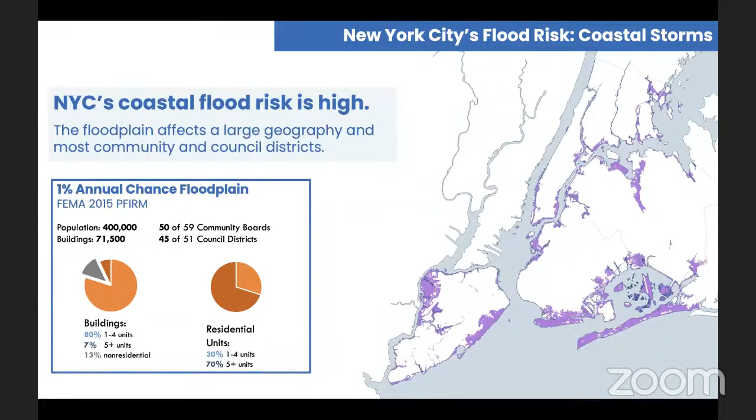This is important because it makes New York distinct from the floodplain across the rest of the United States and presents a challenge to New York City and other urban areas, because FEMA's regulations are very much based on a suburban or rural mindset of single-family detached homes. So one of the challenges New York City has is that the federal regulations and the federal insurance program are geared to that suburban or rural mindset, and we have to come up with our own strategies for the building stock in New York by and large. Next slide, please.

That was looking at just the flood risk that we face today, but we recognize that our floodplain will grow with sea level rise and climate change. By the 2050s, the 1% annual chance floodplain is projected to grow in size, anticipated to grow further inland. That's going to cover roughly 1/4 of the city's total landmass.

It will very closely resemble today's 0.2% annual chance floodplain. With that growth in geography, the number of people in that future floodplain is expected to be roughly 800,000 residents. That's not counting population change over the next several decades, just today's population in that larger geography. The number of buildings would go up from roughly 71,500 today to 122,000 by the 2050s using the high-end projections.

That infrequent flooding event, like a Hurricane Sandy or the 1% annual chance storm, is just one dimension of flood risk in New York City. Another dimension are the lowest lying areas of the city, where sea level rise will lead to what will be regular or even daily tidal flooding in some of the most low-lying areas.

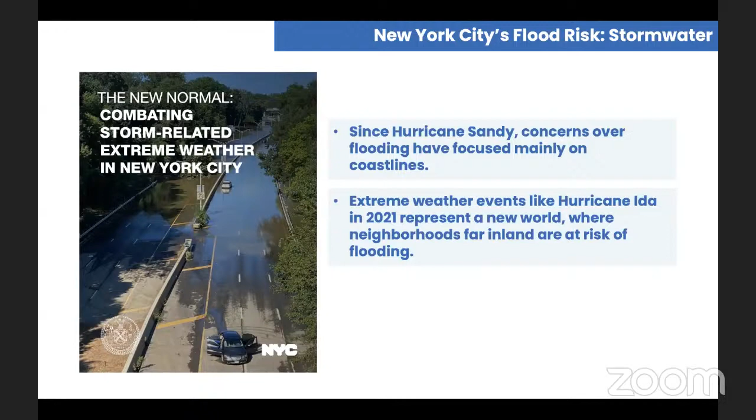So we present this vision for climate resiliency and adaptation. In the next 10 years, urban coastal adaptation will be driven by the climate justice principle that all New Yorkers should live, learn, work, and play in safe, healthy, resilient and sustainable environments, even as the climate changes.

So I'll start to lay out the goals and strategies. Goal number 1 is about expanding the awareness of climate risks and how New Yorkers can take action to adapt to the impacts of climate change. Part of this is about building a common understanding of local climate risks.

In New York City, we are fortunate to have the New York City Panel on Climate Change, a 20-member independent body that produces science on current and projected climate trends. These are convened at the behest of the mayor, but work independently. The NPCC was codified into Local Law 42 in 2012 with a mandate that they provide an actionable source of climate information on future climate change.

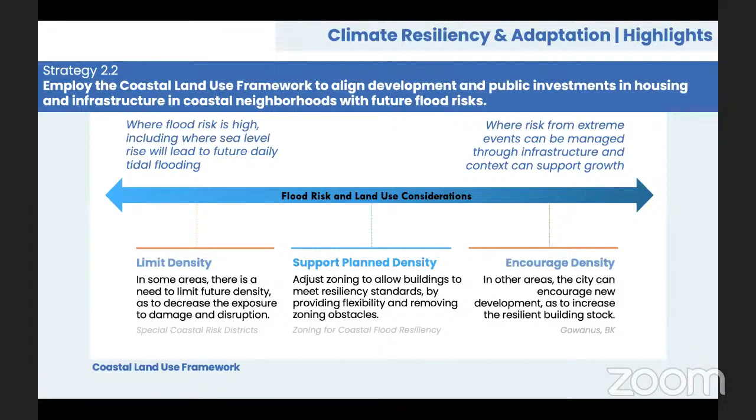That is what we did with zoning for coastal flood resiliency that the City Planning Commission adopted last year. Then finally, where risk from extreme events can be managed through infrastructure and the context overall can support growth, we seek to encourage density. These are areas of the city that can encourage new development as a means of increasing the resilient building stock. This is a strategy that played out with Gowanus.

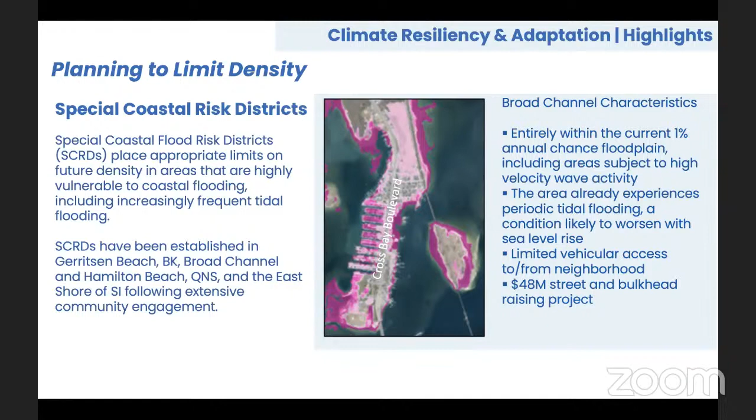There's very limited vehicular access to and from the neighborhood today, just one road north and one road south. And the neighborhood is already undertaking a $48 million street and bulkhead raising project to elevate those streets on the left-hand side of the image that are particularly low-lying.

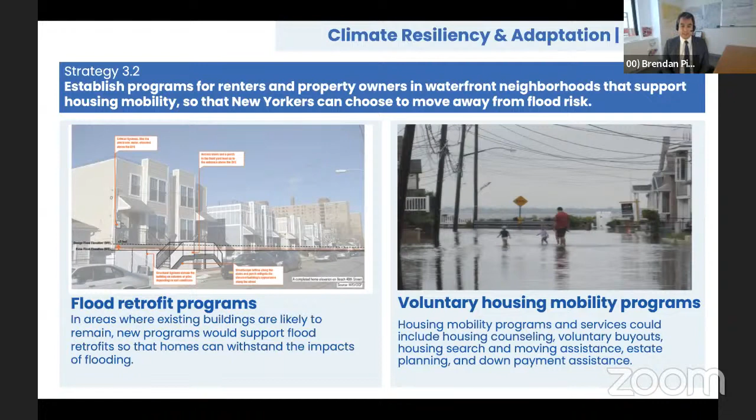The next goal speaks to coastal protection. These are the engineered systems that minimize the effects of storm surges, wave impacts, and sea level rise that are part of the city's multiple lines of defense. Coastal flood protection projects work in tandem with design features for buildings and critical infrastructure that raise mechanical equipment, livable space, and other uses above projected flood elevations.

Coastal protection projects can be large scale, spanning miles of the coastline and covering multiple neighborhoods. They are cross-jurisdictional projects that require extensive coordination and collaboration. The city's goal is to continue to identify opportunities for coastal protection where feasible to manage the impacts of climate change.

The city is in the process of planning and building out a $15 billion portfolio of coastal protection projects to reduce flood risk in neighborhoods across New York City. Several of the city's post-Hurricane Sandy coastal protection projects are now entering their construction phase. However, given the different funding sources and the varying complexity of these projects, they're expected to come online at different times through the 2020s.

One quick note about coastal protection projects: they often come to the City Planning Commission following years of planning and engagement, with land use actions that are relatively minor compared to the scopes of these projects, to provide coastal protection and to maintain or even enhance access to the waterfront. These actions can include amendments to the city's streets and grades and the acquisition and development of property that are necessary to link these systems together.

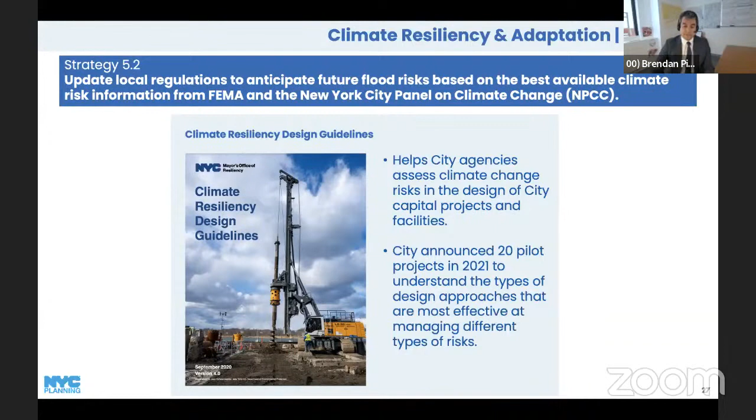In summary, the goals for climate resiliency and adaptation focus on expanding climate risk awareness and action, using climate risk information in public policies and investments, supporting the housing needs of waterfront residents, managing risks from flooding, and promoting climate resiliency design of buildings and infrastructure systems. The strategies that Michael and I have outlined will help New York City do just that.

Now, before I wrap up, I'd like to take the opportunity to connect what you just heard about the Comprehensive Waterfront Plan to a project that is coming back to the Commission for pre-hearing.

That project is Resilient Edgemere. With Resilient Edgemere, the Department of City Planning has worked side by side with HPD to apply the coastal land use framework to the neighborhood.

For that reason, a new special coastal risk district and amendments to the area's urban renewal plan would place strict limits on future development in the most vulnerable areas of the neighborhood, generally north of Beach Channel Drive. In less vulnerable areas of the neighborhood, generally along Rockaway Beach Boulevard and the elevated A train line, the land use actions would modestly increase residential density to support the development of new, resilient, affordable housing in the neighborhood.

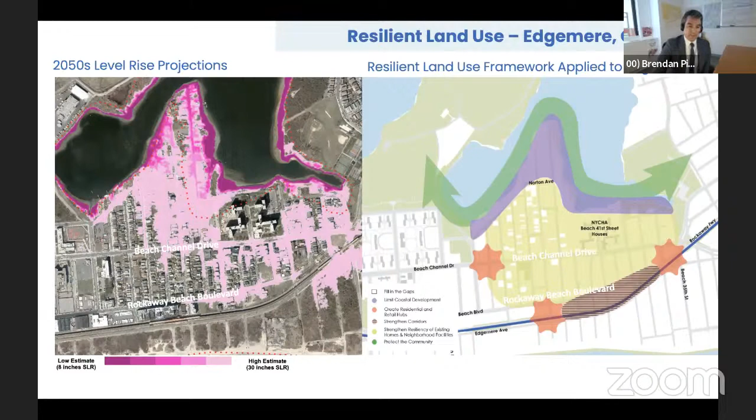When considering sea level rise projections, it is also important to keep in mind that the projections are a snapshot in time and do not reflect changes on the ground. While Edgemere faces significant flood risk, it is distinct from other areas of the city where the city has established special coastal risk districts, in that the Army Corps of Engineers has demonstrated and has funding for a coastal protection project. The Army Corps is currently designing a system that will reduce Edgemere's exposure to low-level coastal storms and sea level rise. While the potential for coastal protection is encouraging, it reduces Edgemere's flood risk.

It doesn't eliminate it. Because of this, HPD is taking a conservative approach to zoning and land use in light of long-term flood risk, while also seeking to enhance the vibrancy of a majority-minority neighborhood. This approach helps demonstrate how the far-reaching goals and strategies of the Comprehensive Waterfront Plan can be applied at the local level in support of a more resilient, more equitable, and healthier waterfront for all New Yorkers.

We really appreciate the opportunity to present on the Comprehensive Waterfront Plan this afternoon. That's the conclusion of this presentation. If time allows, Michael and I would be happy to take your comments and questions.

Thank you very much, gentlemen. We appreciate your presentation. I have a couple of questions for you.

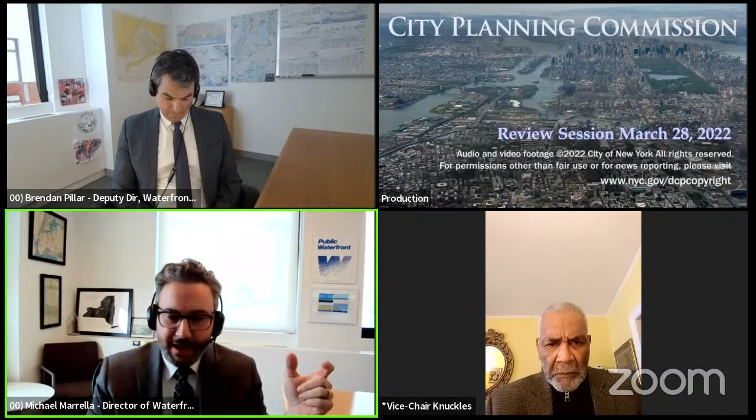One other dimension that's incredibly important is that there's the natural hazard, there are the implications on the structure, and then there are the implications on the lives of the inhabitants of the structure. You could have the same level of flooding for two different homes — if they're built identically, the flood risk would be the same. But if one homeowner has a mortgage and one does not, that could have huge implications for the rebuilding of that home thereafter, for instance.

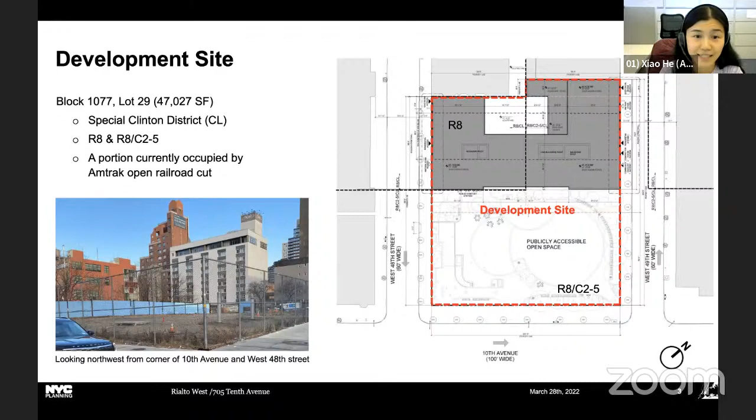As you can see from this close-up view of the development site, the middle and eastern portions of the site are vacant and the western portion of the site is occupied by the railroad cut. And here are photos showing a view from West 48th Street and 10th Avenue looking northwest, and a view from West 49th Street and 10th Avenue looking southwest.

The proposed development consists of a new 8-story mixed-use building and a publicly accessible open space on a shared zoning lot. The building would have 157 affordable rental units. There will be approximately 125,000 square feet of residential floor area and around 6,000 square feet of ground floor community facility space. There would also be a gym and laundry facility on the ground floor and a publicly accessible Parks Department comfort station fronting the adjacent open space. The rear of the building would also have an approximately 2,700 square foot landscaped inner courtyard for residents.

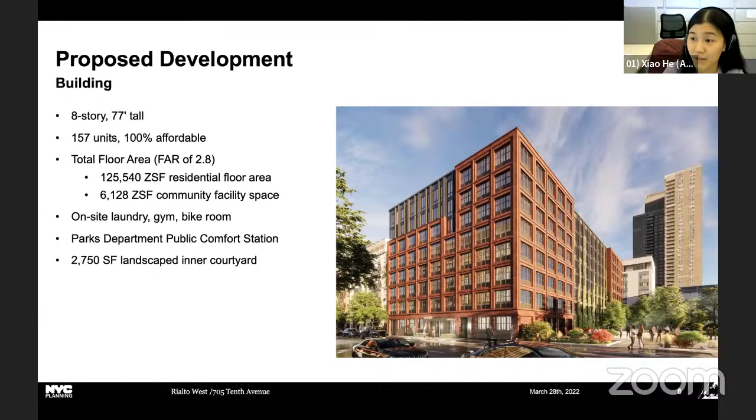As mentioned on the previous slide, there will be approximately half an acre of publicly accessible open space, which would sit on top of a city water tunnel. The space would remain under the jurisdiction of the Department of Environmental Protection, DEP, and would be maintained and managed by the Parks Department. The space would have a plaza and synthetic turf area, spray showers, seating areas, paths, and planted areas.

Zooming out from the development site itself, the surrounding area is mixed use with residential and community facility uses on the side streets and mixed use residential buildings with ground floor commercial use on the avenues. The building heights range from 4-story walk-ups to 15-story elevator buildings. There are several schools and supportive living services within a few blocks. In terms of open space, Hell's Kitchen Park and Clinton Community Garden are both located within half a block. The area is well served by public transit, with numerous subway stations within half a mile of the site.

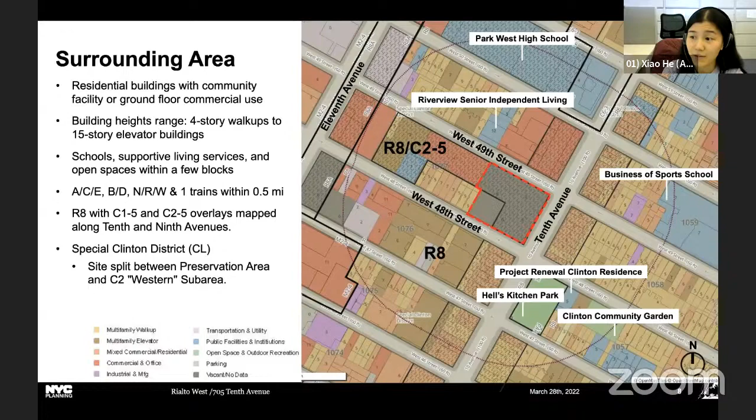Most of the area surrounding the development site is located within an R8 residential zoning district with C1-5 and C2-5 commercial overlays mapped along 10th and 9th Avenues. And as I previously noted, the entire site is in a Special Clinton District, which extends west of 8th Avenue between West 41st Street and West 59th Street. The site is split between the Preservation Area subdistrict and the Western sub-area. Both areas are subject to the same FAR, height, and setback regulations, which I'll go into greater detail on when I discuss the proposed actions.

A bit of background for context. In 2009, as part of the Western Rail Yard rezoning, the city committed to building affordable housing at 2 sites: this site, which is DEP owned, and an MTA owned site at 806 9th Avenue. The commission may recall that the proposed development at the MTA site, known as Thereto, is subject to a separate application certified on January 3rd and going through ULURP. HPD also obtained UDAAP designation and disposition authority for both sites in 2009.

Now I'm going to go through the proposed actions. The first action requested by HPD is a UDAAP approval of the development site. I mentioned previously that HPD obtained UDAAP approval and disposition authority in 2009, for the future housing portion of the development site. This newly proposed UDAAP seeks to cover the entire lot to facilitate the construction of the open space in addition to the proposed housing.

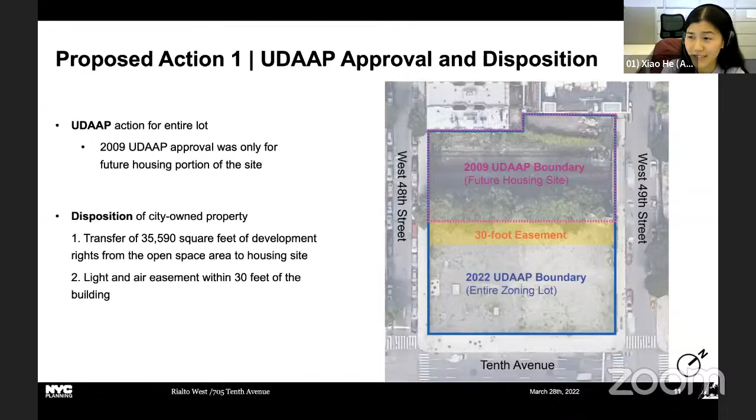The second proposed action is an amendment to the Special Clinton District text. This text amendment consolidates the existing height and setback waiver into a single section in the zoning resolution and allows modifications to bulk regulations, except FAR. In order to qualify for bulk waivers, the proposed project needs to meet 3 conditions: the zoning lot must be at least 40,000 square feet, it must front on a wide street, and it must contain existing public infrastructure.

This amendment was tailored to apply to 2 sites only, the DEP site of this presentation and the MTA site. As the commission may recall, this text amendment is identical to the amendment proposed in the application for Thereto, which is the proposed development at the MTA site. Therefore, this proposed action will be withdrawn if this amendment gets adopted through that application.

The amendment also creates 4 findings for the bulk waivers. These findings relate to difficulties in complying with regulations, light and air, scale and placement, and difficulties on the site.

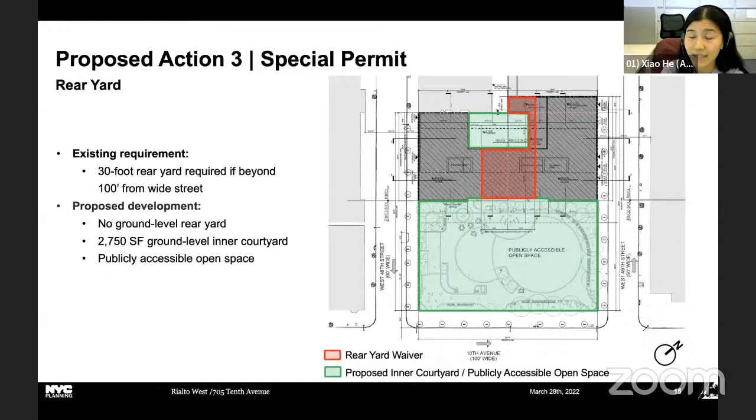Next slide. And to summarize, HPD is seeking to facilitate the development of an 8-story, 100% affordable housing building containing 157 units and around 6,000 square feet of ground floor community facility space. There would also be a publicly accessible open space next to the building. The proposed actions include a UDAAP approval with a disposition, a text amendment, and 2 special permits. And with that, I'm happy to take any questions.

Great. Thank you very much, Ariel. Excellent job. We appreciate it.

Let me just, I think I know the answer to this, but I just want to clarify. The disposition is on 2, there's 2, this is a slightly unusual one, which is why I want to highlight it. It's a disposition of development rights to the housing site here. That's one. And the other is restricting construction on the open space. Can you just say a little bit more about those two?

The second item on our agenda is a certification of a zoning map, zoning text amendments, special permit, city map amendment, and authorizations in Queens Community District 1. Our presenter is Sarit Platkin. Good afternoon, commissioners. Next slide, please.

This is a private application by Astoria Owners LLC for a series of land use actions to facilitate approximately 1 million square feet of development, including 1,400 residential units, including 350 affordable units, 1,800 square feet of commercial space, 23,000 square feet of community facility space, and 43,000 square feet of publicly accessible open space in Astoria Community Board 1, Queens. Next slide, please.

The project area is located on the Hallett's Point Peninsula on the East River waterfront. Two major prior land use approvals in the surrounding area include Hallett's Point and Astoria Cove that are jointly anticipated to facilitate over 4,000 units of housing, including 800 affordable units through the Voluntary Inclusionary Housing Program.

In 2013, the City Planning Commission approved Hallett's Point, a large-scale general development plan and related actions affecting a 34-acre area along the western and southern portion of the Hallett's Point Peninsula, directly southwest of the project area. The actions intended to facilitate approximately 3 million square feet of development across 11 buildings ranging in height from 11 to 31 stories. The development will consist of approximately 2,600 dwelling units, including 480 permanently affordable units, 70,000 square feet of retail, a public school and public intermediate school, and a 2.4-acre waterfront esplanade.

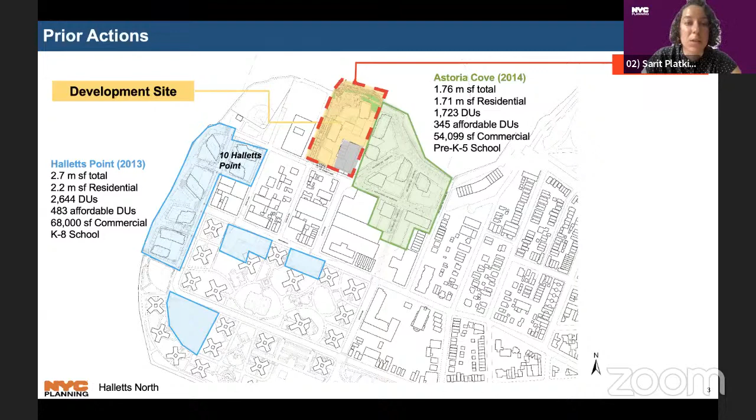To date, construction on the Astoria Cove development has not commenced. Next slide, please.

The surrounding area includes a mix of residential, commercial, light industrial, and park uses. The area directly east of the project area includes the Astoria Cove development site and is improved with warehouses and vacant industrial buildings. The area to the northeast is characterized by high-density residential waterfront development and open space, including the 23-story Shore Towers condominium development and Astoria Park. The area directly south is characterized by a mix of 1- and 2-story light industrial warehouses, open storage yards, and low-scale 1- and 2-family residential uses.

The New York City Housing Authority Astoria Houses, consisting of 1,100 units across 22 six- and seven-story buildings on a 27-acre campus, encompasses the southern half of the Hallett's Peninsula. Directly west of the project area is a large 2-story warehouse and distribution center for Airport Enterprise Technology that abuts Whitey Ford Field. The western edge of the Hallett's Point Peninsula includes the Hallett's Point development site that is currently vacant apart from 10 Hallett's Point, a 400-unit residential building with a fresh supermarket 2 blocks west of the project area.

Nearby public facilities and institutions include the Astoria Houses Community Center, Urban Upbound Jobs Plus, and Astoria Blue Feather Early Learning Center, located approximately 0.3 miles to the south of the project area, and the St. Margaret Mary Roman Catholic Church and Holy Protection Greek Orthodox Church, approximately 1/3 mile to the east of the project area.

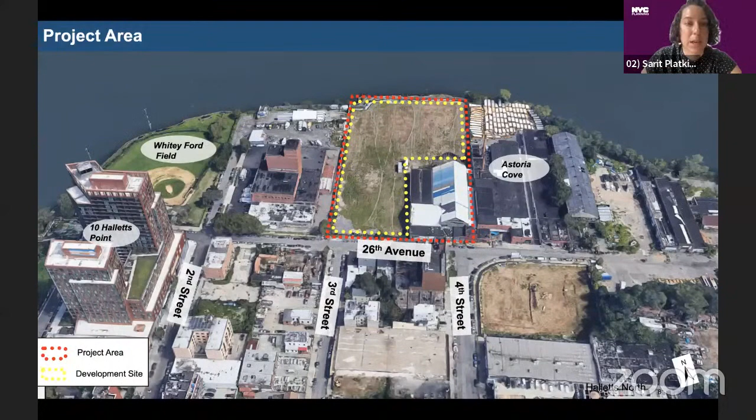The actions would facilitate the development of a mixed-use building with 3 building segments that would contain a total of approximately 1 million square feet of floor area at 6 FAR, including 1,400 dwelling units, 1,800 square feet of commercial

floor area, 22,000 square feet of community facility floor area, 525 accessory parking spaces, and approximately 1 acre of publicly accessible open space. The proposed development would also include 350 permanently affordable units pursuant to option 1 of the Mandatory

Inclusionary Housing, or MIH, program.

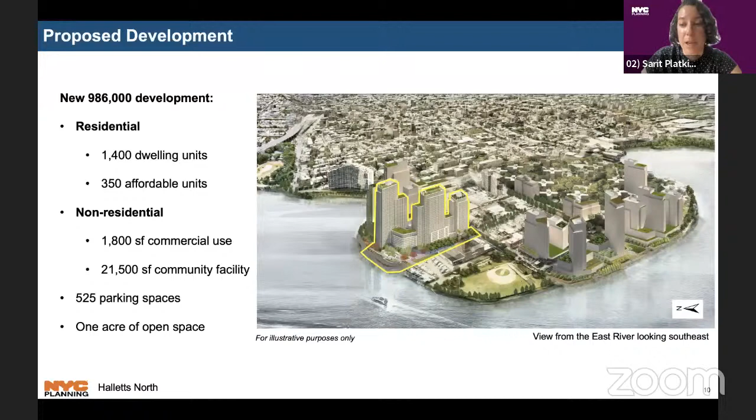The proposed development would consist of 3 building segments that increase in height as the development approaches the East River waterfront. Segment 1 would front 26th Avenue and rise to a maximum height of 238 feet, or 23 stories, above

a building base of 130 feet, or 13 stories. Segment 2 would be located along 3rd Street and rise to a maximum height of 318 feet, or 31 stories, above a 240-foot, or 25-story section of the building.

Segment 3 would be located at the end of 3rd Street facing the East River and rise to a maximum height of 350 feet, or 34 stories, above a 110-foot, or 10-story building base.

Given the long facade, the applicants have employed strategies such as setbacks along 3rd Street to break up the massing and create more of an undulating effect on the facade.

Non-residential uses would be located at the base of the building, concentrated along 26th Avenue to provide amenities and retail to the surrounding area. Due to the project area's location within flood zone AE, the proposed development would be elevated approximately 8 to 9 feet, such that it would be approximately 3 feet above the base flood elevation.

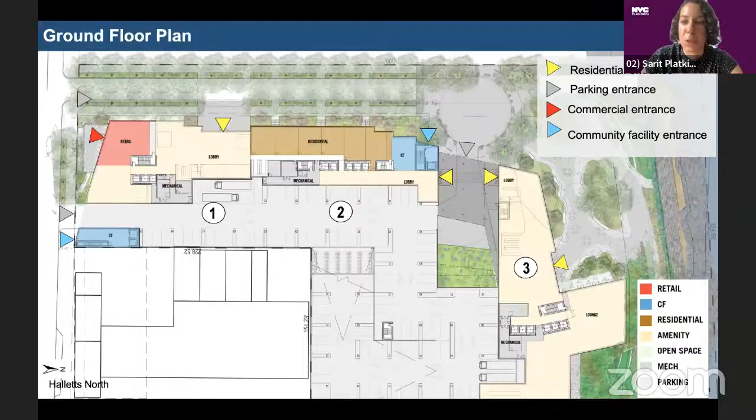The proposed development would contain approximately 1 acre of publicly accessible areas, equivalent to 20% of the development site's lot area being developed in each phase.

The publicly accessible areas would consist of a waterfront esplanade that runs along the entire length of the development site, fronting the East River, and would be accessed by an upland connection and roundabout that extends along 3rd Street to an entrance on 26th Avenue.

The open space would be accessed via a plaza with terraced seating and retail at the intersection of 26th Avenue and 3rd Street.

The upland connection type 2, connecting the waterfront esplanade with 26th Avenue, would be coterminous with 3rd Street and include a 2-way, 50-foot wide unmapped street for pedestrian and vehicular use. Two pedestrian sidewalks between 13.5 and 14.5 feet wide would flank the roadway and include bench seating and planting strips that would collect stormwater runoff.

The upland connection would contain 12,800 square feet. 3rd Street would terminate with a 70-foot wide roundabout that would be separated by boulder bollards from the rest of the waterfront public access area.

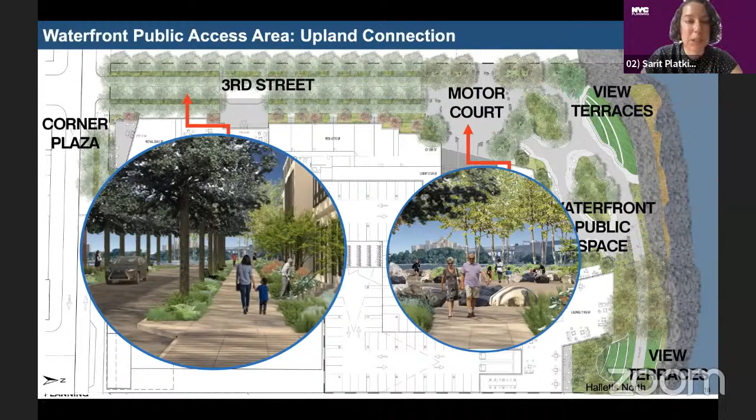The waterfront esplanade would contain approximately 14,000 square feet of shore public walkway and 11,000 square feet of supplemental public access area. The shore public walkway would include oyster-shaped rain gardens, terraced and turfed seating areas along the waterfront, and 5 fitness stations. The esplanade would also contain pedestrian seating and companion seating along the perimeters with open social spaces.

The proposed development would introduce a diverse planting palette, including street and canopy trees along 3rd Street, seaward plantings, a meadow plant mix, and rain garden plant mixes, which will diversify the waterfront area.

The actions will include a zoning map amendment from an M1-1 district to an R7-3, C2-4 zoning district, a zoning text amendment to map a mandatory inclusionary housing area, and a waterfront special permit to waive height, setback, tower size, and maximum length of walls facing the shoreline pursuant to zoning resolution section 62-837A.

Waterfront authorizations to modify requirements within the waterfront public access area pursuant to zoning resolution sections 62-822A and 62-822B, and a waterfront authorization for phased development of the waterfront access area pursuant to zoning resolution section 62-822C. The final action is a city map amendment to demap the portion of 3rd Street between 26th Avenue and the East River.

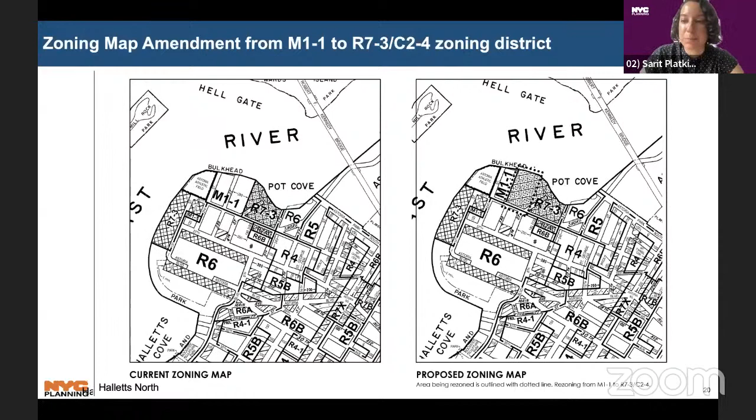The second action is a zoning text amendment. The applicant proposes to establish a new MIH area in Queens Community District 1 in Appendix F of the zoning resolution. Pursuant to the MIH program, the applicant is proposing to map MIH Option 1. Option 1 requires affordable housing to be provided equivalent to 25% of the residential floor area developed at an average of 60% of the area median income, with 10% at 40% of the area median income.

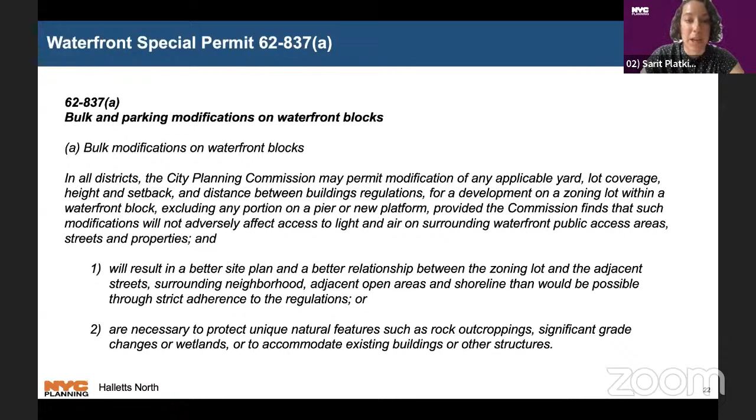The third action is a special permit pursuant to zoning resolution section 62837A. Special permit 62837A for bulk and parking modifications on waterfront blocks permits the commission to modify applicable yard, lot coverage, height and setback, and distance between buildings for development on waterfront blocks to achieve a superior site plan and protect natural features while not adversely affecting access to light and air on surrounding waterfront public access areas, streets, and properties.

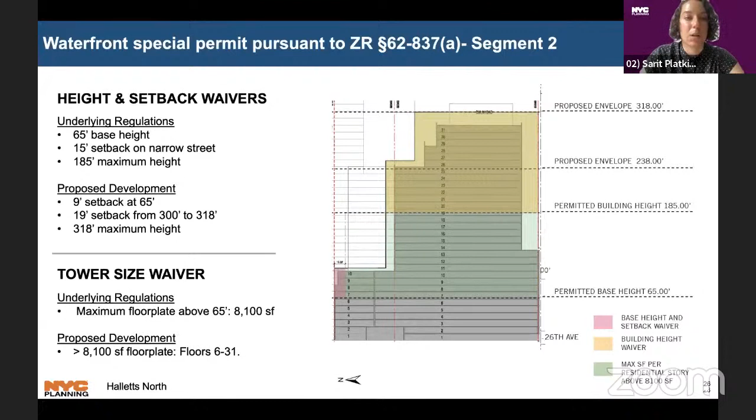For segment 2, the applicant is requesting to waive the following requirements, including maximum setback and base height regulations in connection with 3rd Street. At a height of 65 feet, segment 2 would set back 9 feet from 3rd Street up to a height of 300 feet. Segment 2 would then set back at least 19 feet from 3rd Street for the remainder of the building height. The applicant is also requesting to increase the permitted maximum building height from 185 to 318 feet. And lastly, the applicant is requesting to waive maximum tower size regulations on floors 6 through 31 above the maximum base height to permit floor plates up to 27,000 square feet.

For segment 3, the applicant is requesting to waive the following requirements, including maximum setback and base height regulations in connection with the shore public walkway. At a height of 65 feet, segment 3 would not set back the required 30 feet from the shore public walkway up to a height of approximately 350 feet. The applicant is also requesting to increase the permitted maximum building height from 185 to 350 feet. And lastly, the applicant is requesting to waive maximum tower size regulations on floors 7 through 34 above the maximum base height to permit floor plates up to 41,000 square feet.

In segment 3, the applicant is also seeking to increase the maximum length of walls facing the shoreline from 100 to 275 feet.

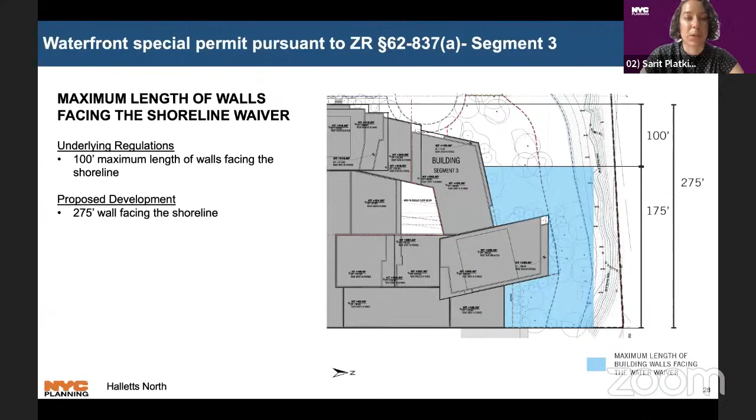The 4th and 5th actions are waterfront authorizations pursuant to zoning resolution section 62-822A and 62-822B. The applicant is seeking waterfront authorizations to facilitate a superior site plan that promotes a unique design and a planted upland connection with pedestrian and vehicular access. The authorizations would also allow the applicants to overcome site planning constraints, which include flood resilient construction and proactive strategies for stormwater management.

The first waterfront authorization pursuant to zoning resolution section 62-822A permits modification of requirements for location, area, and minimum dimensions of waterfront public access areas and visual corridors that comply with the required minimum dimensions for waterfront public access areas and provide equivalent public use and enjoyment.

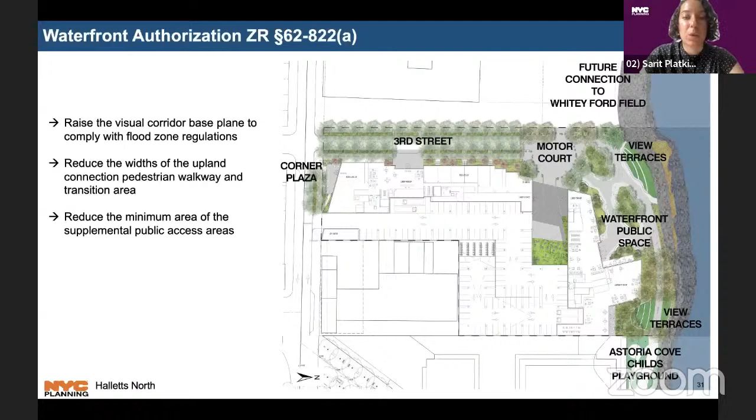Pursuant to zoning resolution sections 62-822A, the applicant proposes to modify the WPAA regulations by raising the visual corridor base plane to permit resilient construction and modifying the widths of the upland connection walkway, transition area, and supplemental public access area.

The second waterfront authorization pursuant to zoning resolution section 62-822B permits modification of requirements of waterfront public access areas that would result in an equivalent or superior design.

Pursuant to zoning resolution 62-822B, the applicant seeks a series of modifications to the waterfront public access area, or WPAA, to allow vehicular access on a planted upland connection. These modifications include permitting vehicle access, delineating the vehicular area by boulders, modifying tree pit width, and reducing the pedestrian clear path.

Other modifications to permit an equivalent or superior site plan relate to reducing lawn requirements, shifting the bike rack locations, and modifying lighting requirements.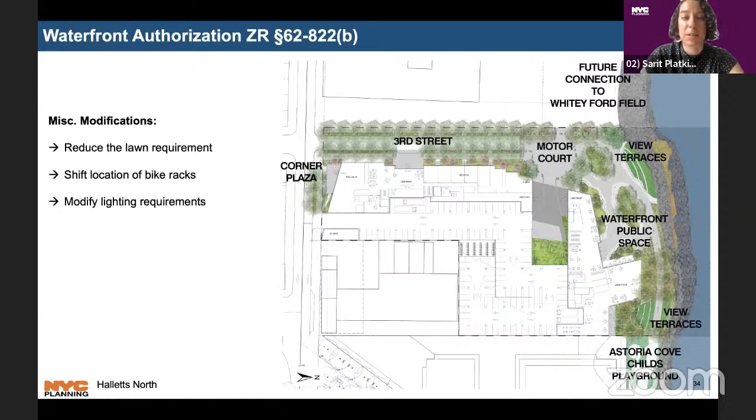The sixth action is an authorization pursuant to zoning resolution section 62-822C for establishing a phasing plan. Pursuant to zoning resolution section 62-822, the City Planning Commission may authorize a phasing plan to implement waterfront public access area, or WPAA, improvements on zoning lots undergoing partial development. To grant such authorization, an applicant must demonstrate that the amount of WPAA developed in each phase is proportionate to the lot area being developed in each phase.

Pursuant to Zoning Resolution Section 62-57C, 20% of the lot area on the development site must be a waterfront public access area, and 20% of the lot area must be developed as a WPAA in each phase of development.

The proposed development would proceed pursuant to a three-phased construction plan. Phase 1 would facilitate 250,000 square feet of development, including 299 housing units, including 75 permanently affordable units, which would account for 25% of the total development's floor area. The applicant would provide approximately 21,000 square feet of the WPAA, equivalent to 49% of the total in Phase 1.

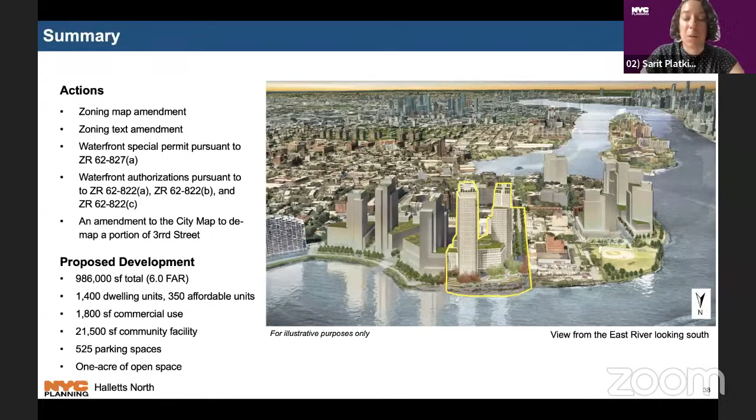Thank you very much, Sarit, and thank you for a complete and detailed presentation. I was actually going to ask you about that point you raised at the end, because the massing here does look pretty snug.

As I understand it, this is proposed to be an R7-3, much like the other sites previously done at Astoria Cove and Hallett's Point, but on a much smaller space. Can you put that into some context for us? This is also 986,000 square feet. What was fit onto each of those other recent sites? If you have that at your disposal, I'd be interested.

Sure. So to put this into context, the surrounding sites were rezoned as well to R7-3 C2-4. However, Astoria Cove directly to the east is a 9-acre site, more than twice the size of this property, which is 4 acres. And Hallett's Point is several times the size at 34 acres, extending the entire western edge of the peninsula and into the southern portion as well. So these are quite different scales overall when thinking about the amount of floor area being fit into this site, which is why there is this resulting constrained configuration of the 3 towers that I noted.

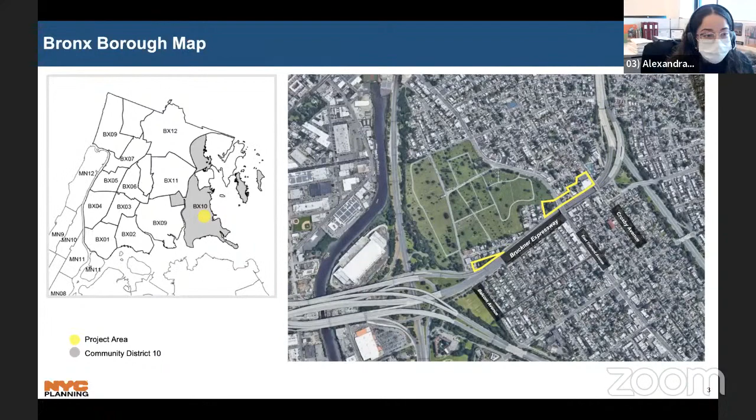The applicant, Neck Associates LLC, seeks a zoning map amendment and a zoning text amendment to map a new MIH area in Schuylerville neighborhood, Community District 10 in the Bronx. The overall project area is located on the northern side of Bruckner Boulevard between Crosby Avenue to the east and Balcom Avenue to the west. The northern project area is composed of 3 blocks located between Crosby Avenue to the east and Revere Avenue to the west.

Bruckner Boulevard is a wide street that runs east-west, and it is separated by the Bruckner Expressway, which runs below at its center. Although the surrounding area is located outside the transit zone, it is well served by public transit.

East Tremont Avenue is a wide street that runs north-south across the project area, and it is an important commercial corridor of the neighborhood. It connects to Morris Park, which is a major job center located to the north, and 2 bus lines run along that ensure prompt access to the nearest subway station, Middletown Road, 8 minutes away from the project area, connecting to Throggs Neck and River Park Towers.

Crosby Avenue is a wide street that runs north-south at the edge of the project area, where another bus line runs along, bringing connections also between Locust Point and Williamsbridge.

Important community resources are located in the surrounding area, such as PS X014, Senator John Calandra, and St. Benedict Roman Catholic Church. Recently, in 2020, the Throggs Neck BID was mapped along East Tremont Avenue, and the project area is close also to the Old Saint Raymond Cemetery.

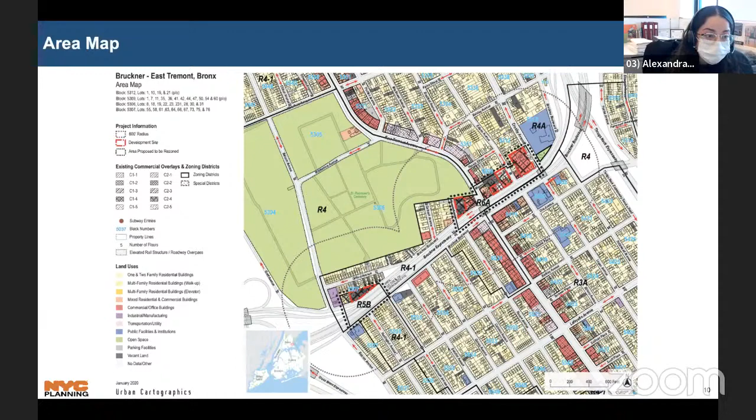Now I will walk you through the development sites and their proposed projects one by one. Development Site A is located at 2945 Bruckner Boulevard, a corner lot located at the intersection of Bruckner Boulevard and Crosby Avenue, with an area of approximately 103,000 square feet.

It is currently occupied with a 1-story grocery store on the site, as well as accessory parking. The proposed development will contain a new 8-story mixed residential and commercial building with approximately 142,000 square feet of floor area, reaching a total of 8 stories, including 10-foot setbacks above the base height of 65 feet. The first floor will contain approximately 17,000 square feet of grocery store, which will replace the existing grocery store in place.

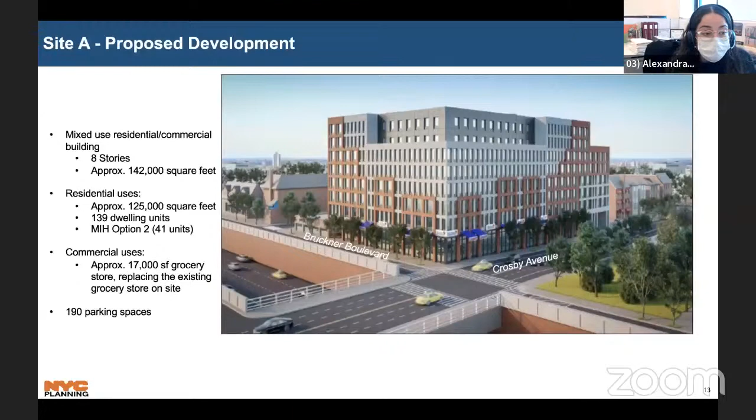The rest of the floors will contain approximately 139 dwelling units, of which 41 will be permanently affordable. It also includes approximately 190 enclosed and unenclosed parking spaces on grade and in the cellar.

Development Site B is comprised of several lots on block 5309, a corner lot located at the intersection of Bruckner Boulevard and Edison Avenue, with an area of approximately 28,000 square feet. It is currently occupied with vacant commercial and residential uses, as well as vacant fenced lots. The proposed development on Site B will contain a new 5-story mixed-use residential and commercial building with approximately 101,000 square feet of floor area.

The first floor will contain approximately 23,000 square feet of community center and recreational facility for youth, which will include an early childhood education facility, as well as recreational space such as batting cages. There will also be space for local retail. The rest of the floors will contain approximately 114 dwelling units, of which approximately 34 will be permanently affordable. It will also include 75 parking spaces.

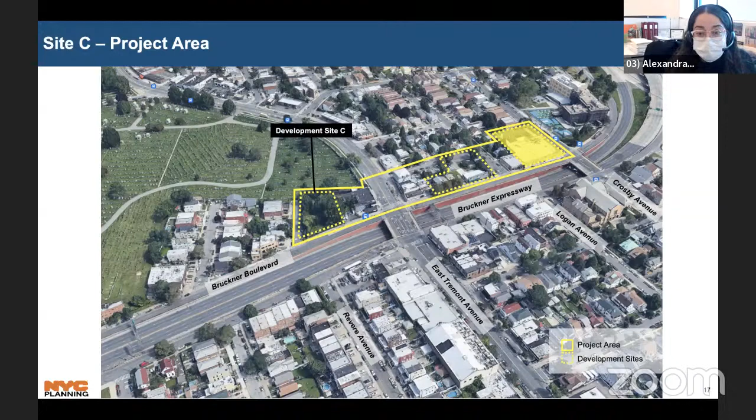Development Site C comprises several lots of block 5307, a corner lot located at the intersection of Bruckner Boulevard and Revere Avenue, with approximately 70,000 square feet of lot area. The site is currently vacant, fenced off, and overgrown. The applicant proposes a new 8-story mixed residential and commercial building with approximately 63,000 square feet of floor area.

The building will reach a total height of 8 stories, including 15-foot setbacks above the base height. The first floor will contain approximately 13,000 square feet of professional office space, and the rest of the floors will contain approximately 64 dwelling units, of which approximately 19 will remain permanently affordable. It also includes 29 parking spaces.

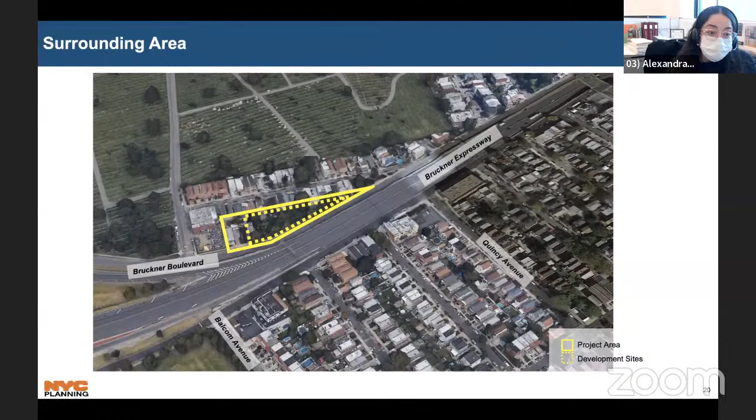Development Site D is comprised of several lots on block 5307, an irregular shaped lot located on the northern side of Bruckner Boulevard between Balcom and Quincy Avenues, with approximately 70,000 square feet of lot area. The site is currently vacant, fenced off, and overgrown. The applicant is proposing a new 3-story residential building with approximately 16,000 square feet of floor area, producing 22 dwelling units. It also includes 9 parking spaces.

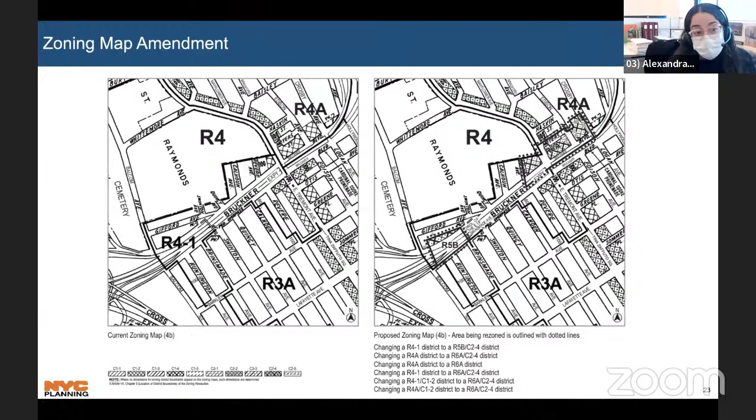In order to facilitate these developments, the applicant is requesting a zoning map amendment to change an existing lower density district, R4A, C2, C12, R4A, R41, C24, and R41 districts to a contextual medium density district, which is R6A, C24, and R6A. It also proposes to change from an existing lower density district R41 and R2 to an R5B contextual lower density district.

Coterminus with the northern project area, which corresponds to the change to an R6A district between Crosby Avenue and Revere Avenues, the applicant is proposing to modify Appendix F of the zoning resolution to establish an MIH area.

A following action that the commission will see in an upcoming review session is a change on the city map that will help facilitate the development in Site B. This change is to demap a privately owned, unbuilt street located on Meyers Street between Edison and East Tremont Avenues. Together with these proposed land use actions, the development of Site B will be possible.

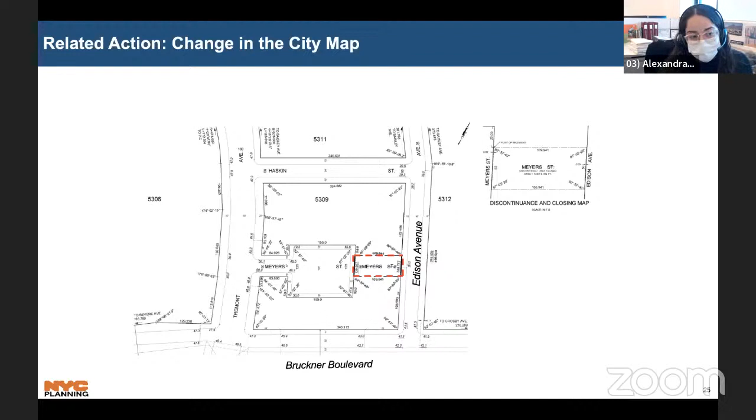That concludes my presentation, and now I'm happy to answer any questions.

Excellent, thank you as always, Alexandra. Just for context for a moment, the area that surrounds these sites, particularly going above the Bruckner on the map — actually that may be west — but in the area on your map just above the sites, that's predominantly R4, R4A, R3A.

Can you say a little bit more about the appropriateness of R6A on Bruckner, and how you would rationalize that as we go forward here?

In terms of land use and context — and then I'll pass it to Carol and Sean to talk about the history of the area — we're looking here at blocks and lots fronting a very wide street, which is our first approach to areas where a change from lower density to medium density buildings is appropriate from an urban design perspective. Taking a look at the land use, this is very close to an important commercial corridor of the neighborhood, such as East Tremont Avenue. At the same time, its proximity to public transit and how it is well served by different bus lines that efficiently connect residents to other modes of transportation all together make us believe these are appropriate locations for a change from lower to medium density districts.

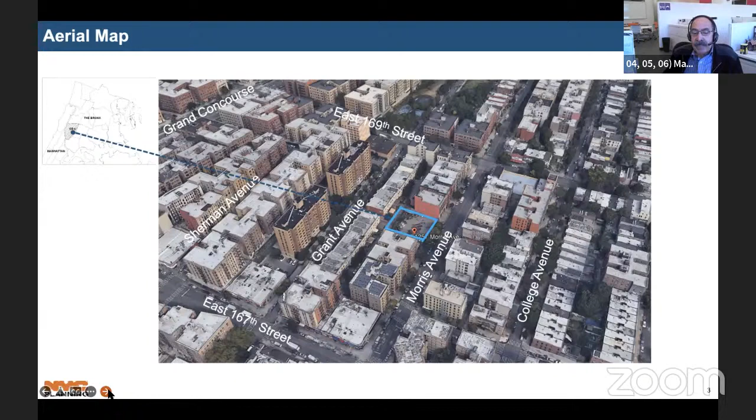As you will recall at certification, the current location for EMS 17 is at 1080 Ogden Avenue, in an old firehouse that is inadequate to EMS's needs. This existing site has been proposed for a new community facility use, to be developed in consultation with Community Board 4 and other local stakeholders as part of the Bronx Borough-Based Jail Plan.

Here is a rendering of the proposed EMS facility. The Public Design Commission has reviewed this project and approved this design. That concludes my presentation. I'm happy to answer any questions you may have.

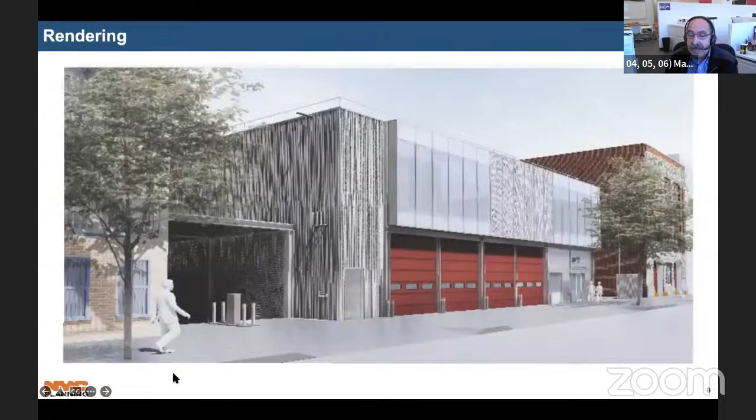Commissioner Burney. Thank you. Just a quick question, Manny. About the city issuing an RFP for the old firehouse, I wonder if there was a response to that from DCAS, because I recall when they closed Engine 204 in Brooklyn in 2006, the building is still lying vacant and unused, and the city hasn't acted on it. So I'm wondering if you got definitive plans from DCAS as to repurposing the old building. No, I haven't seen any new plans, but I can follow up with DCAS to get the information for you.

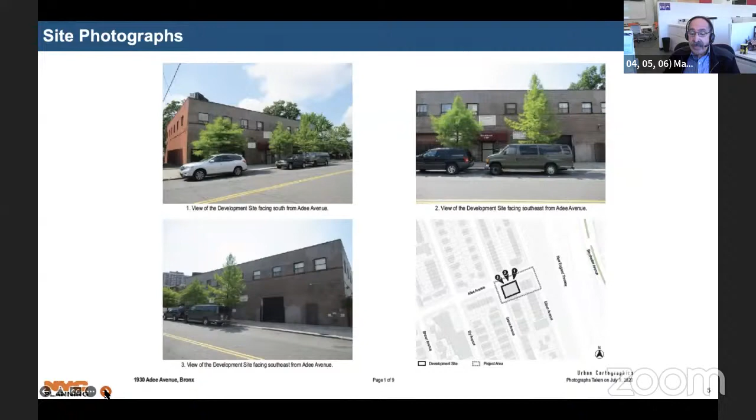Here is a photo of the development site, which contains a building constructed in 1948. This building is not in conformance with the R4 district front and side yard regulations, FAR, and lot coverage. In addition, the building was enlarged without the necessary DOB permits. DOB has issued violations.

Here is a photo of the rest of the project area, which basically consists of 3 lots that contain 3-story attached residential buildings.

The image on the left shows the current zoning designation in and around the project area. The image on the right shows the establishment of the R6B zoning. The R6B district has a 2.0 FAR, 2.2 with MIH, and allows community facility use. No side or front yards are required.

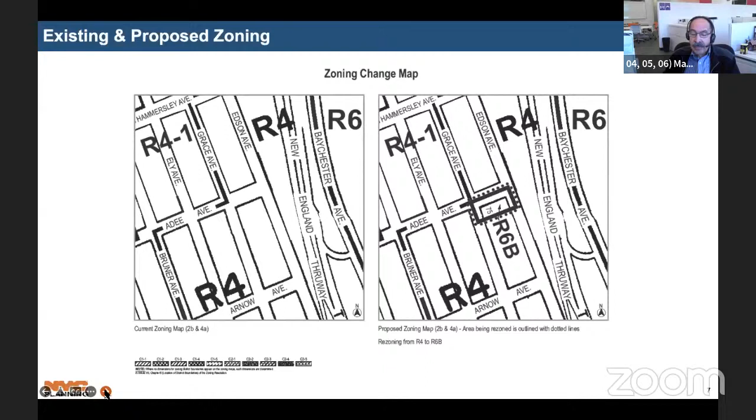Bronx Community Board 12 voted unanimously in favor of this application with conditions. The conditions are that the adjacent residential homes be excluded from the zoning change because it will allow for future residential development up to a height of 50 feet. The community board has also requested that a restrictive declaration be instituted for the purpose of limiting development only to the development site and for use as a daycare center only.

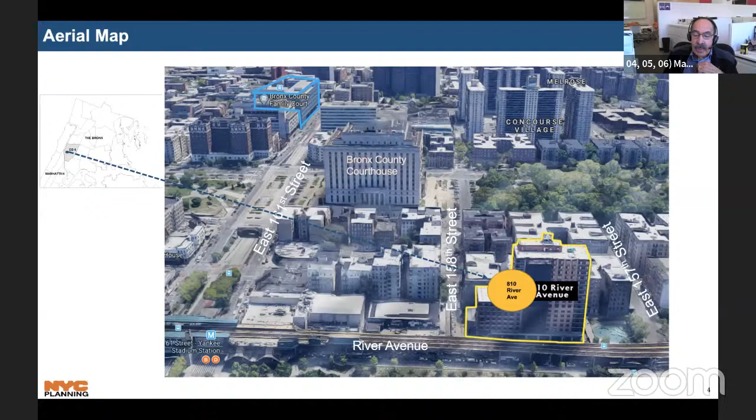I'd be happy to answer any questions you might have. Great, thank you very much, Manny. You're welcome.

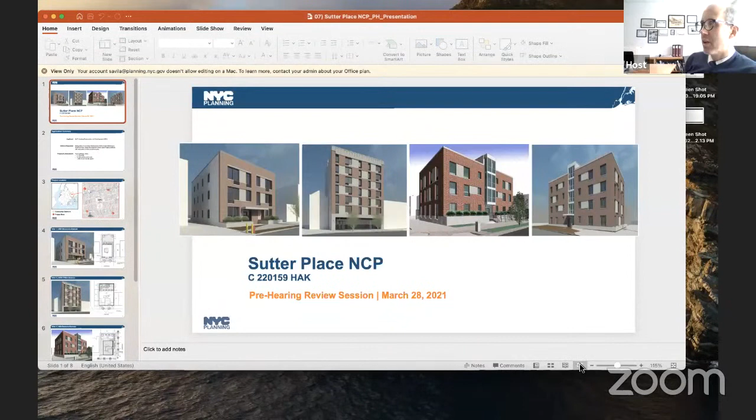Next, we're going to go to our Brooklyn pre-hearings. Ryan: That's right. The 7th item on our agenda is a pre-hearing review of a UDAP designation and disposition of city-owned property in Brooklyn Community District 5. And Karina Leung is our presenter. Karina: Hi, good afternoon, commissioners.

This, as Ryan said, is an application coming back for pre-hearing. Next slide. So this is an application by the New York City Department of Housing, Preservation and Development for a UDAP designation and approval, including disposition of city-owned property. This application would facilitate the development of 4 buildings that would collectively create 46 affordable rental units and approximately 1,800 square feet of commercial space.

Next slide. The 4 project sites are located in the central part of East New York in Brooklyn Community District 5. I'll walk through each of the proposed developments, starting with the first site in the top left and then moving clockwise. Next slide.

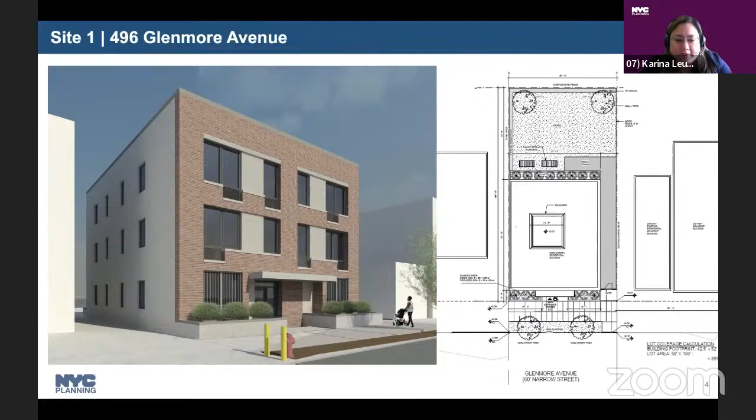So the first site is a 5,000 square foot vacant city-owned lot on the south side of Glenmore Avenue, which is a narrow street. The site was zoned R5 until the 2016 East New York rezoning, when an R5B zoning district was mapped along Glenmore Avenue and the adjacent mid-blocks to preserve the lower scale residential character of the area. The proposed development would comply with this lower density contextual zoning and would include 6 dwelling units in a 3-story, 6,100 square foot building. Next slide.

The second site is a 5,400 square foot vacant city-owned lot on the south side of Pitkin Avenue, which is a wide street with the A/C subway line running along it. Pitkin Avenue is one of the local commercial corridors that had been targeted for growth in the East New York rezoning. Before the rezoning, it had been largely zoned R5 with commercial overlays that had high parking requirements. In the rezoning, this corridor was then rezoned to R7A C2-4 and mapped with an enhanced commercial district to support transit-oriented development with active ground floor uses.

MIH was also mapped on this site, requiring 25% of units to be permanently affordable to households at an average of 60% of AMI. The proposed development at the site would be an 8-story building with 26 units and approximately 22,000 square feet of residential space, and then it would have 1,800 square feet of commercial space on the ground floor. Next slide.

The third site is a 5,400 square foot vacant city-owned lot located on the northwest corner of Dumont Avenue and Ashford Street, which are both narrow streets. The proposed 6,700 square foot 3-story building will have 6 rental units. A mayoral zoning override was granted to waive one of the 2 required 10-foot front yards in order to facilitate a better site plan and layout of the units. The proposed development is otherwise compliant with the R5 zoning in place on the site.

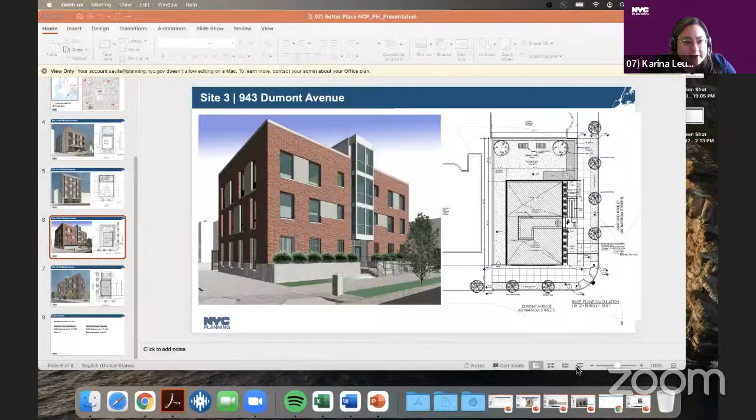Great, thank you. Only one for me. Can you just say a little bit more about Site 3's mayoral override? Jeff, are you able to pull up the presentation and go back to slide 6?

In the plan, you can see Ashford Street is on the right and Dumont Avenue is on the bottom. R5 zoning requires 10-foot front yards on both sides of the corner lot, so there would have been a 10-foot yard required along Dumont Avenue. HPD requested a mayoral override so they could have the maximum possible yard further back along Ashford Street. The sidewalk was also wide enough along Dumont Avenue that it didn't pose a public realm issue.

Okay. Okay. Commissioner Burney. Oh, thank you. Karina, I was just having trouble understanding on 2358 Pitkin, what's happening on the ground floor?

Jeff, can you show slide 5? So the ground floor is just storefront. It's mostly commercial space, and then there's a residential entry, but generally just storefront glazing across the entire ground floor.

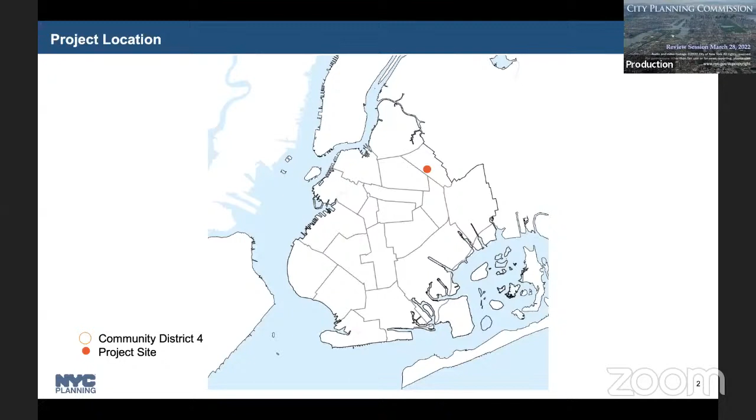The project is located in Community District 4 in the Bushwick neighborhood in Brooklyn, at 1175 Gates Avenue, 1.5 blocks north of Broadway, with Bushwick Avenue to the south, Evergreen Avenue to the north, and Gates Avenue to the southeast. The surrounding area is mapped with an R6 zoning district.

The Roundtable Senior Center serves approximately 200 seniors per day, with services operating Monday through Friday between 9 a.m. and 7 p.m., and consists of a variety of activities including meal service, case assistance, education, recreation, health promotion, and nutritional education.

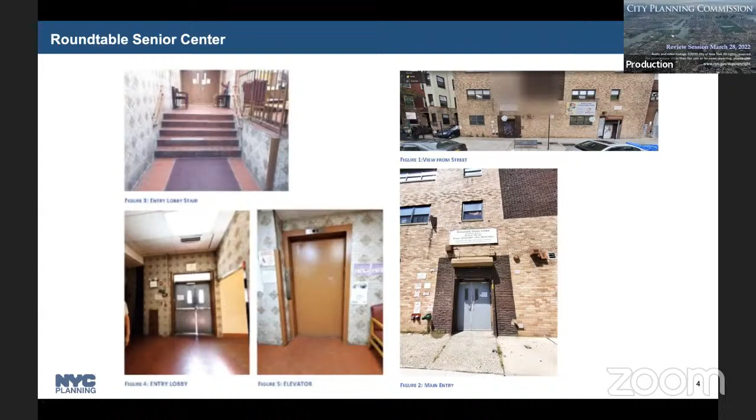The community board held a hearing on the application on February 16th, 2022, and has unanimously submitted a recommendation to approve the application with the stipulation that a 20-year lease is secured. It's our understanding that DCAS and DFTA have every intention of securing that 20-year lease.

The borough president held a hearing on the application on February 17th, 2022, and has submitted a recommendation to approve the application.

I wanted to take this opportunity to briefly touch upon some of the design improvements to the exterior that the applicants and the property owners intend on addressing, as some of these improvements were not part of the plan at certification. This image shows the facade of the building with the entrance to the senior center on the left, with a rendering of planters between the entrances. The exterior facade is to be cleaned consistently to remove all graffiti or unauthorized painting. And the Department for the Aging is exploring the potential of adding street trees outside the building and improving signage at the building entry.

As noted, these planters shown here are to be added in front of the building. The exterior door is to be painted to match the door of the adjacent daycare entrance on the right side of the building, and the roll down shutter in front of the front entrance is to be removed. Finally, new windows are to be replaced, and this is likely to occur in 2023.

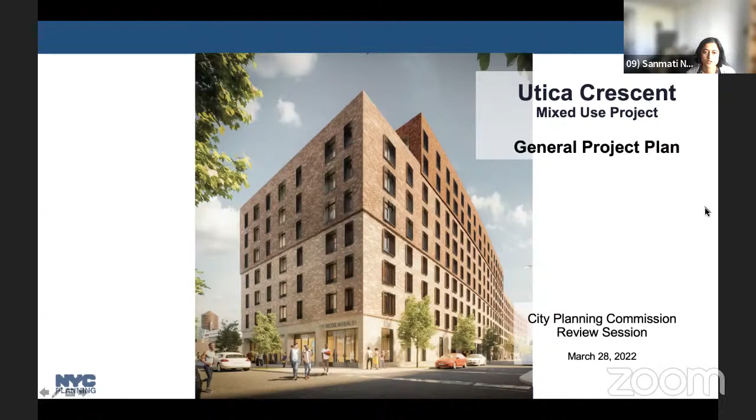ESD is requesting a letter of approval for the zoning override for its GPP and design guidelines. ESD needs an override so they don't have to build pursuant to New York City zoning resolution and meet the requirements of the underlying zoning district. Regarding the CPC purview, the CPC is being asked to support the zoning override. The CPC can request changes and make suggestions. However, ESD does not have an obligation to accept the recommendations. The project is located in Community District 9 in Brooklyn.

The proposed project is part of the State of New York's Vital Brooklyn Initiative, which is a comprehensive community development program that addresses chronic social, economic, and health disparities in central Brooklyn, one of the most underserved areas in the state. This team has been selected as the conditionally designated developer back in 2020.

The project site shown in red is located just north of the East Flatbush neighborhood along Utica Avenue. There are 2 other future Vital Brooklyn development sites within CD9. One is the Kingsbrook Jewish Medical Center located just west of the project site, and the other is within the Kingsboro Psychiatric Center located between Winthrop Street and Clarkson Avenue towards the west.

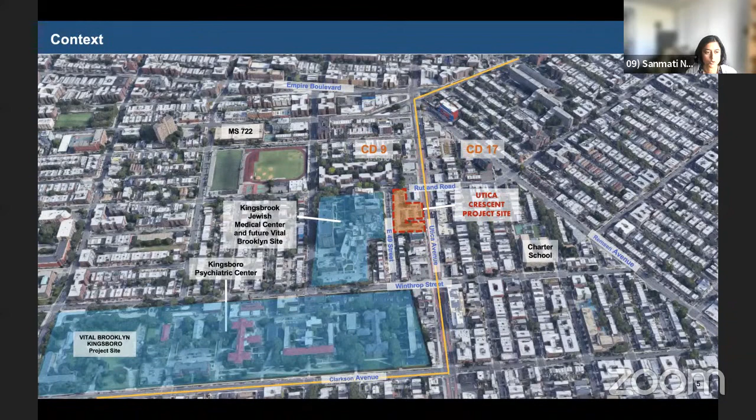The surrounding area includes a mix of residential, commercial, and transportation and community facility uses. The residential uses are predominantly 2-story row houses and 3 to 6-story multifamily buildings. The commercial zone along Utica Avenue contains 1 to 3-storied buildings, including auto-oriented uses, a hotel, and local retail uses. The community facility use includes a medical institution, a house of worship, and a daycare. The lot adjacent to the project site, just at the corner of Utica and Rutland, is not owned by the applicant. It contains a gas station. The area is located within the transit zone and served by a couple of bus lines, including an SBS route along Utica Avenue, and the nearest subway stop is 3/4 mile to the north along Empire Boulevard.

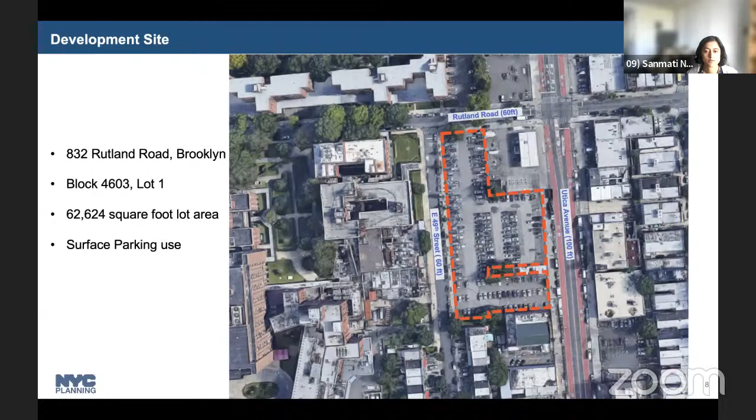The proposal includes residential, commercial, and community facility uses. It is envisioned to be a health-focused development consisting of a single building with a one-story base and towers fronting the streets, ranging from 7, 9, and 12 stories in height.

This is an overview of the benefits of the proposed project, which include affordable housing and supportive housing and wellness opportunities to the residents in this area.

The total area of the proposed development is approximately 391,000 gross square feet. The table provides further breakdown of uses, which includes approximately 321,000 of residential and 22,500 of commercial retail use.

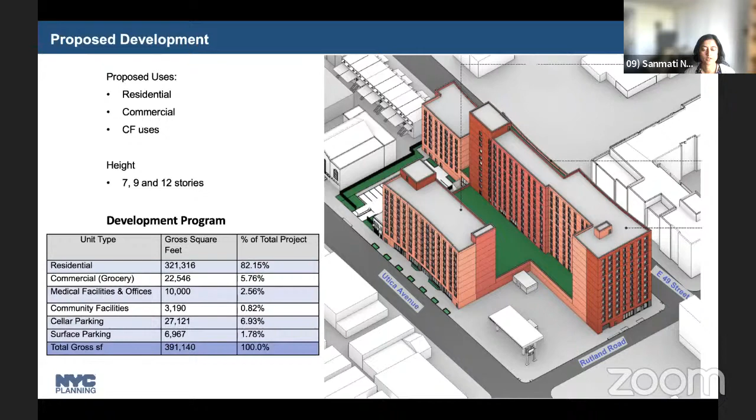This is a 100% affordable housing development, includes 322 units containing a mix of unit types, and it would serve seniors, formerly homeless persons, and people from low-income families and individuals.

The proposed uses on the ground floor include a dialysis center, grocery store, and a charitable organization which provides social services and programs to those in need. The grocery store has frontages along both Utica and East 49th Street, and access to the residential towers is also from both Utica and East 49th Street.

This plan shows the second floor, showing the landscaped courtyard and the indoor recreational spaces, which are reserved for the residents of the development.

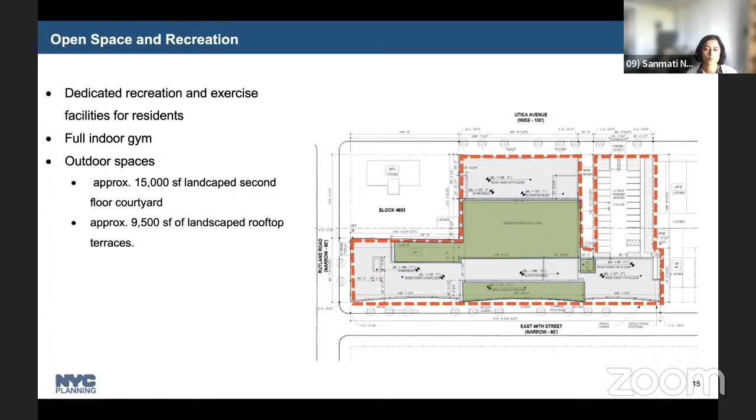The open space includes the landscape terrace on multiple levels, and there would be dedicated recreational and exercise facilities, including a mix of programmed and flexible spaces.

So, the zoning overrides and the design guidelines: the existing zoning R6 and C8-2 does not allow for the uses, the height, and the bulk which is proposed in the GPP. In order to implement the proposed project, ESD would need to override the New York City zoning resolution in accordance with the UDC Act and establish design guidelines which would govern the proposed development and act in lieu of zoning and other local requirements.

Pursuant to SEQRA, the New York State lead agency has determined that the proposed project is an unlisted action and has prepared an environmental assessment statement. As part of the coordinated SEQRA review process, both HCR and ESD have made a determination of non-significance.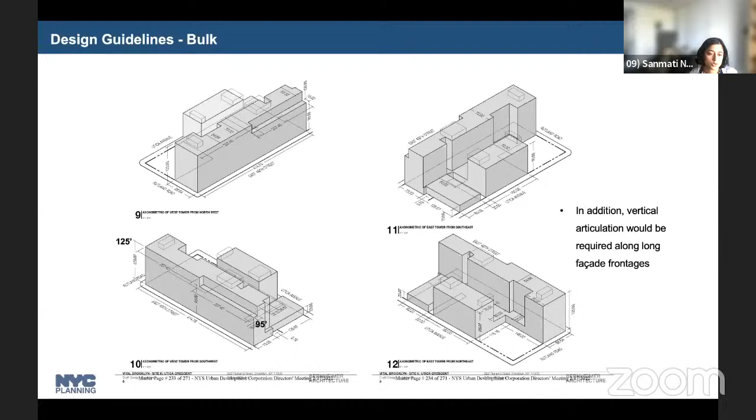These show the design guidelines, the building envelope that is being approved. Along Utica Avenue, there's a maximum base height of 23 feet, which rises up to 95 feet. Along East 49th Street, the max base height is 23 feet and rises to 95 and 125 feet. In addition, vertical articulation would also be required along the long facade frontages.

The design guidelines also include requirements for various components of the proposal, like the lots, signage, street yards, and the open space. DCP worked with ESD and the development team, which led to establishing certain design guidelines, including a minimum ground floor transparency of 50%, a requirement of a 7-foot deep landscape buffer along the Utica Avenue surface parking lot, and parking lot landscaping to enhance Utica Avenue's pedestrian experience and to limit curb cut width along Utica Avenue.

Coming towards the end of the presentation, we want to outline two outstanding concerns we have. The first is regarding the overall bulk distribution. As currently proposed, the development is 7, 9, and 12 stories along East 49th Street, and 7 stories along Utica Avenue.

Considering the context of Utica, which is a 100-foot wide street, an SBS route, and an emerging corridor, and in contrast, East 49th, a 60-foot wide side street with 2 to 6 story buildings, DCP had suggested redistribution of bulk, moving more bulk towards Utica Avenue to make the proposal more compatible with the context.

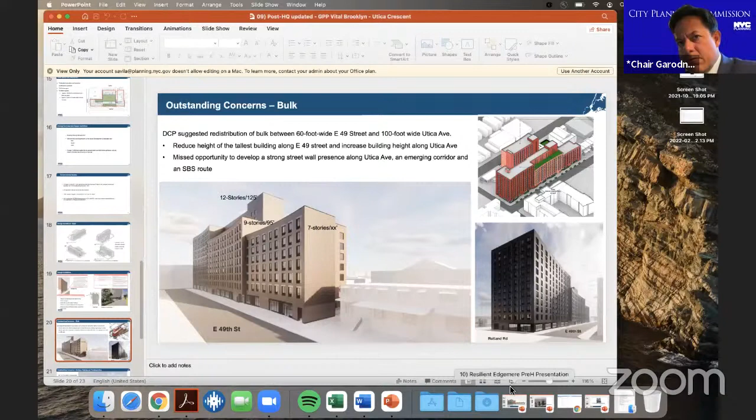So here there are a combination of factors. One is the out-parcel condition, which is the gas station, which limits the amount of design flexibility they have. I'm not too sure about the fair housing concerns, so I can't really speak to that. But the third factor is the requirement to provide the surface parking lot for the Jewish Medical Center, which is part of the agreement. So all of that together is limiting how they can distribute the bulk.

And I can, Sagi, if you have any more thoughts on that, please jump in. Yeah, if you go to the site plan, maybe that's better explained. I think some of the considerations we've heard from ESD are about efficiency. The lot or parcel along Utica is a smaller lot, and the ability to—the next slide, slide 14, is good as well.

The ability to actually accommodate the amount of units that support the financial feasibility of the building is of a lesser degree. So the concentration for efficiency is along East 49th Street because it's the largest portion of their lot. In addition, per conversations with the hospital team about the surface parking, it needs to be unattended parking for financial feasibility. So a surface parking lot was considered for this project, and the location of it along Utica was determined as being most efficient.

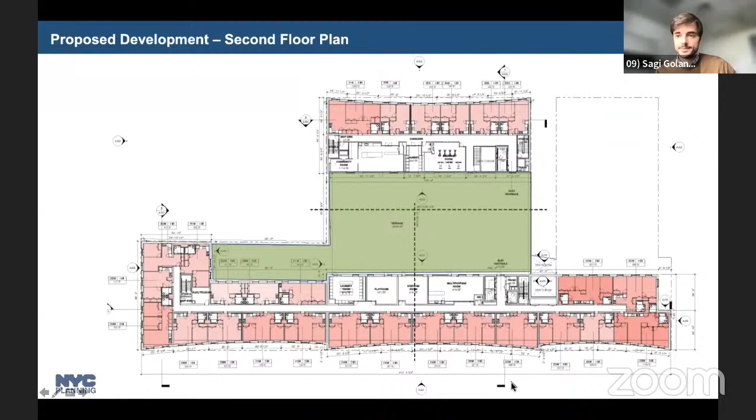Got it, thank you. Commissioner Marin. Let's give him a sec. Okay, thank you, sorry about that.

My question revolves around the statement of needing the location for fair housing, and I'm really not understanding that. If somebody could elaborate on that further, that would be appreciated, because fair housing laws state that everyone should be given an equal opportunity to apply to a building, regardless of race, color, creed, sexual orientation, those kinds of things. So I'm just really stuck on that statement. I would like to understand it.

We can certainly ask for clarification from ESD. Yes, thank you, I would appreciate that. Sure, great, thank you, Commissioner.

Commissioner Levin: So Sanmati, is the idea that we would send a comment letter enumerating the three things you highlighted—shifting the bulk, the parking lot, and I forget the third one—that all made sense to me. That's right, even though ESD has said they're not taking you up on those good suggestions.

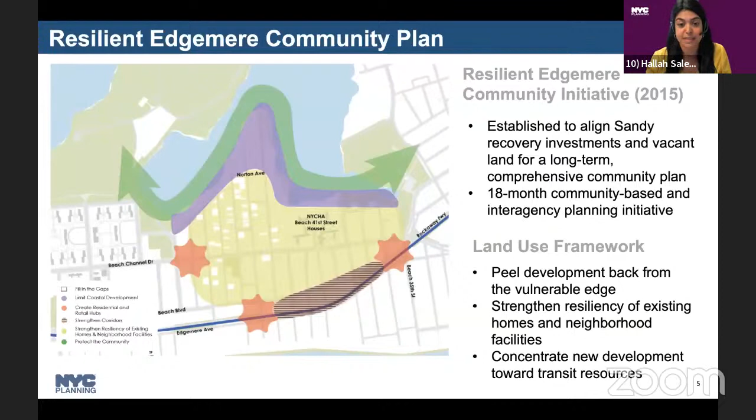The Edgemere neighborhood faces significant flood risk and coastal hazards. The area is located within the high-risk floodplain with a base flood elevation ranging from 9 to 11 feet. A portion of the neighborhood is also located within the coastal A subzone, where wave action during a coastal storm event could result in additional damage to property.

High tide projections for the 2050s show the area will experience twice daily flooding in the next 30 years. The lightest shade of pink represents the most conservative projections we have for sea level rise for the 2050s, which is about 30 inches. However, as shown on the map, the severity of the flooding varies throughout the neighborhood, with the northern peninsula experiencing the most vulnerability, and then there being less flooding further inland.

This condition also only shows the projections of the area absent any intervention or investment, and the U.S. Army Corps of Engineers have planned projects in the area which would reduce flood risk during storm events and tidal inundation over the next 50 years.

The project area has a total area of approximately 166 acres and comprises predominantly vacant and unimproved city-owned land. The Resilient Edgemere project is divided into 4 sub-areas. The hazard mitigation area, shown in red, is directly along the Jamaica Bay waterfront and is the lowest lying area of the project, making it the most vulnerable to flooding and coastal hazards. The plan would limit all city-owned property to open space and any new residential development to single-family detached buildings.

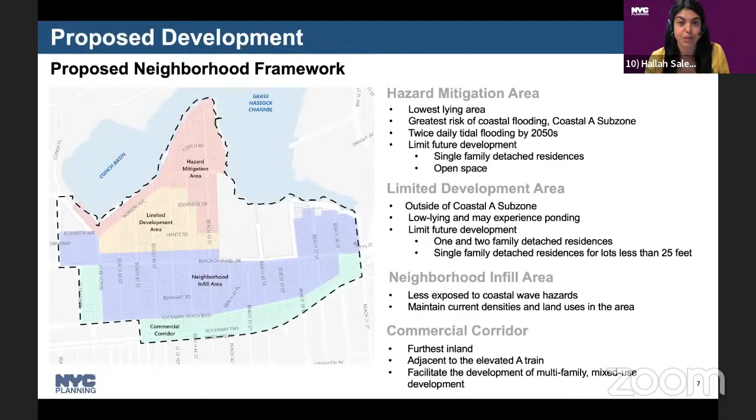The future development potential by the proposed actions would result in approximately a total of 1,222 new residential units and approximately 115,000 square feet of non-residential uses. However, within the commercial corridor, there are 5 sites that are city-owned and would enter into the RFP process following ULURP to develop multifamily mixed-use buildings.

While these buildings have not been designed, the DEIS identified the development potential for these city-sponsored multifamily buildings to result in a total of 530 units, approximately 54,665 square feet of commercial space, and 266 parking spaces.

In order to facilitate the proposed treatments for each sub-area, a set of land uses are proposed, including several zoning map amendments, a zoning text amendment to establish an MIH area and special coastal risk district, several amendments to the urban renewal plan, UDAP designation, and disposition of real city-owned property.

There are a series of zoning map amendments throughout the project area, which would typically restrict the building typology to 1 to 2 family homes and prohibit multifamily development along the northern portions of the neighborhood. An R6A with a C2-4 commercial overlay is proposed for multifamily mixed-use buildings along the southern portion of the project area. Additionally, a special coastal risk district would be mapped on the northern portion to further restrict development beyond the underlying zoning districts.

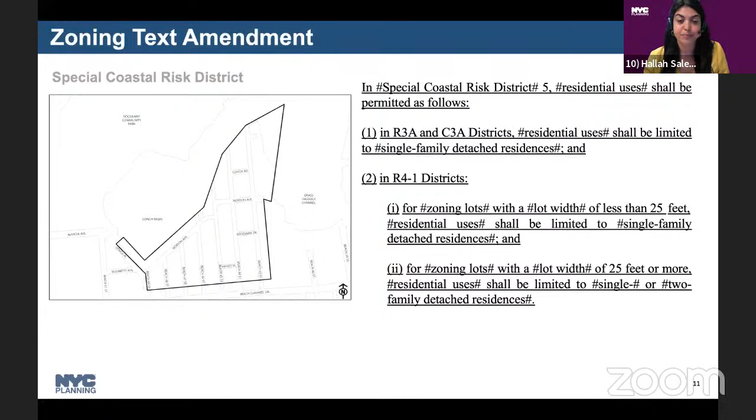The zoning text amendment to establish 2 MIH areas are proposed. One area is generally bounded by Beach 50th Street and Beach 49th Street, between Rockaway Beach Boulevard and Beach Channel Drive. The other area is bounded by Beach 43rd Street and Beach 38th Street, between Rockaway Beach Boulevard and Rockaway Freeway. Both areas are proposed to be mapped with options 1 and 2.

There are a number of amendments associated with the urban renewal plan and the urban renewal area. All sites within the urban renewal area would be acquired, as well as new acquisition for the expanded geography. The urban renewal area boundary would change by the addition of 13 lots and the removal of 9 lots. The duration of the urban renewal plan would also be extended for a period of 40 years from the date of this second amendment.

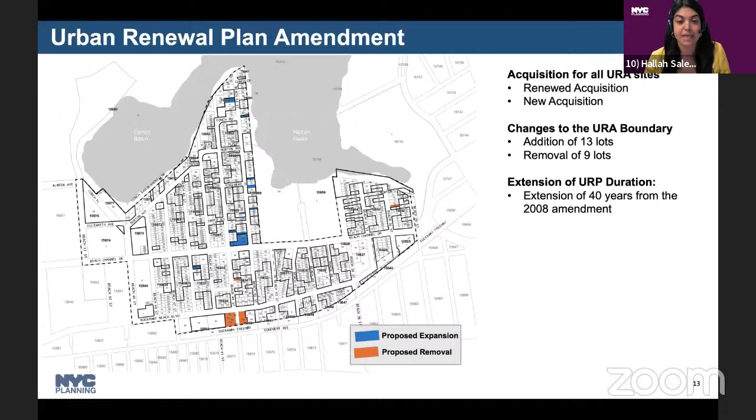Land use designations throughout the urban renewal plan would also be amended. 10 sites would be changed to open space, and 1 site would be added to open space. 4 sites would be changed to commercial and residential, and 2 sites would be changed to residential. Additionally, the definition of open space would be amended to include agricultural uses when permitted by zoning. Lastly, there are 2 amendments to the supplementary controls of redevelopment, which include the change of density to permit up to 1,500 units instead of 800 units, and the removal of height restrictions for the perimeter walls to exceed 25 feet.

UDAAP designation is proposed for 5 sites over 42 lots and 2 demapped roadways. Land uses would consist of residential, community space, and community facility space. Lastly, a disposition of all properties within the urban renewal area is proposed to be disposed to a sponsor determined by HPD.

The DEIS identified adverse impacts in respect to community facilities for early childhood, open space for active recreation, transportation for traffic, transit, and safety, construction noise, and air quality for mobile source, but these are to be mitigated by traffic mitigation measures. No other adverse impacts were identified.

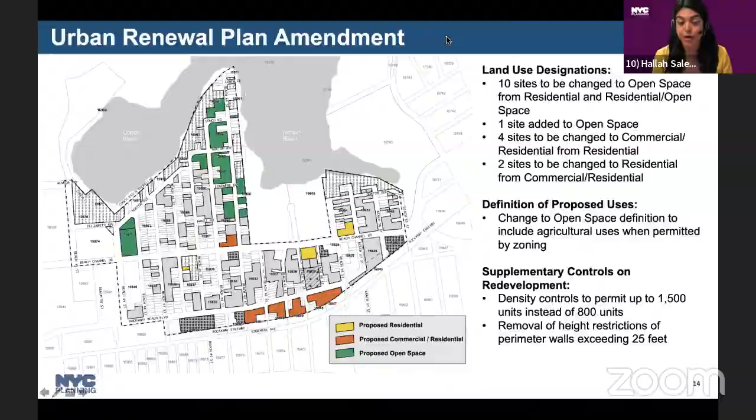Sure, so all of the green spaces that were shown in the map earlier, especially those within the hazard mitigation area, will be designated open space in perpetuity, and they are mostly all city-owned land. Those parcels would also be within a community land trust that would provide, I believe there's 55 lots that are open space going into this community land trust. And that third party, once they have been selected by HPD - they're going through that process currently - would look into resources for the community that could be using those vacant sites. So I can let HPD also further discuss that, but the intention is those would be given over to the CLT and provide some resource to the community.

That's great, I think that's a great opportunity for the neighborhood. If there's a way to somehow connect them so that people see and feel them as a unified whole, as opposed to a lot of individual one-off lots, I think that's really important. This is just a point of clarification - I think I know the answer - the 5 city sites, they're all in the area you described as the commercial corridor, right?

That is, okay. And then the last question is, this becomes, if approved, the 5th coastal risk district in the city. Maybe this is a question for the waterfront guys presented earlier, but can you help me - which of the pieces of all the things that you said makes this a coastal risk district? Is it the fact that you have a hazard mitigation area? Is it a certain number of properties included in this plan that make it that thing, or is it just something that we recognize as - if we're looking at it for the purpose of doing some downzoning and limiting city development - that is it? I don't know if there's a special sauce that makes it the thing.

Sure, yeah. So the Special Coastal Risk District was a tool that was created in 2017, and it was made to address coastal areas that are currently at exceptional risk for flooding and could face even greater risk in the future. So it's a tool that helps us further limit new development in these really highly vulnerable areas. So zoning on its own for the rezoning that we have in both the hazard mitigation area and the limited development area, which are making up this Special Coastal Risk District, would allow up to 2 family homes or something like that. And in the hazard mitigation area, we really want to just limit it to single family detached homes. So the Special Coastal Risk District allows us to further limit development beyond the zoning that's placed in that area.

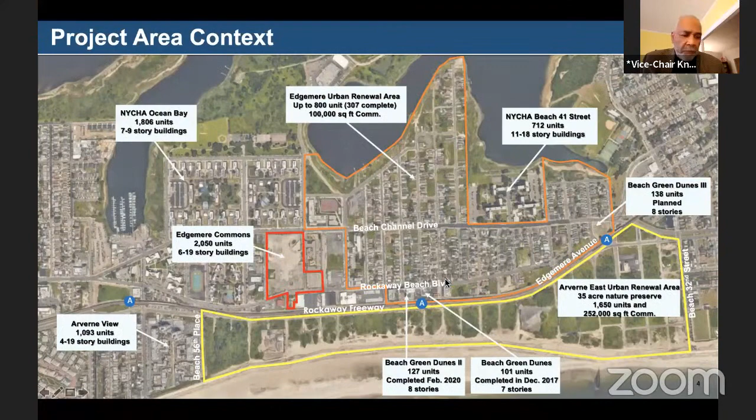If you go back to slide 14, which I think is the aerial - one of the aerial shots that you have - where you have the 5 sites. No, it's an actual aerial with the sites imposed on it, I believe it's slide 16. I think it's slide 8. 14, 14. I think it's slide 8 on my deck. Well, they're different ones that have the same thing, where it has the massing superimposed on the aerial shots. Yeah, like that, I just want to make sure what I'm looking at. That element between the highway and the sites that looks elevated, is that a railroad? What is that? Yes, that's the elevated A line. So that's the subway. Okay.

Don't get out that far. So I didn't know what it was.

Secondly, if you could just elaborate on the community board's rationale for its disapproval. You mentioned something about the R6 designations. Could you just elaborate on that?

Absolutely. Their disapproval was mostly centered around that commercial corridor, the portion of the plan proposing multifamily mixed-use buildings, the R6A with the C2-4 overlay. There's a lot of hesitation to the increased density here, as well as lack of infrastructure. There were also concerns related to home ownership, since these are going to be mostly rental properties in these multifamily buildings, and they wanted some more home ownership opportunities there as well. So it really came down to density, infrastructure, and home ownership as the main points of discussion.

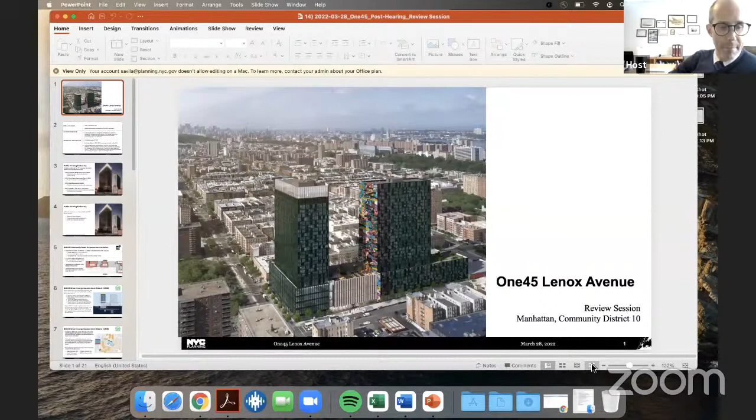Hi, Brian. Actually, Annie's going to kick us off. Oh, okay, yes, Annie, thanks, go ahead. Sorry for the last minute change, but good afternoon, commissioners. Before Jose gets into the formal post-hearing presentation, I wanted to address some questions regarding the proposed development size and use that were raised by Chair Garodnick, Commissioner Goodridge, and others at our public hearing. In our department's evaluation of any project that comes through the pre-certification process, the department does not evaluate proposals based on specific proposed tenants. So according to the applicant, the Museum of Civil Rights remains a component of the proposed development.

The department has evaluated the proposed zoning district and permitted uses independent of the museum component specifically. This special permit, which is part of the application, would limit the space currently proposed for the museum to community facility uses. An alternative community facility tenant does not alter the development's assumptions that were analyzed in our pre-certification process or in the DEIS, and it does not alter our evaluation of the appropriateness of the proposed zoning district.

The department believes the density is appropriate given the currently underutilized site's location at the intersection of 2 wide streets, adjacency to a park and the Harlem River waterfront, and good transit accessibility, including the 3 train on that same block. The proposed zoning map amendment will allow a significant number of housing units, including approximately 250 affordable units through MIH, which would not currently be permitted in the C8 district, as well as additional commercial and community facility uses.

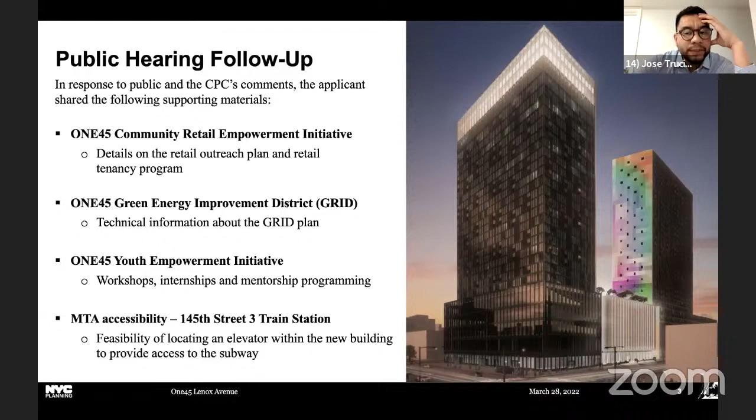The 145 Youth Empowerment Initiative contains details on the programming for the proposed Green Opportunity Workshops, internships, and mentorship program. And last, the MTA accessibility constraint at the 145th Street number 3 subway station. Next slide, please.

We will also have an opportunity to provide additional information during the next review session, slated for April 11th, where we're going to focus on the FEIS's open mitigation proposal, letters of support from key stakeholders, and any follow-up questions that are raised today. Next slide, please.

The 145 Community Retail Empowerment Initiative will prioritize local retail. The initiative is a community-based retail and business incentive program to provide below market rent and preferential space for Harlem businesses. The applicant will reserve at least 20% of the total retail square footage to this initiative, which is equivalent to approximately 6,800 square footage.

Of these, 50% must qualify as MWBEs. Local retail tenants will receive a 10% discount to market rents based on a third-party broker opinion of value. And the applicant is working with 16 tenants so that they can either stay at the new 145 development or find other locations in Harlem.

Excluding the community facility use, the applicant has committed to having no single retail tenant occupying over 20,000 square footage of ground floor space. In order to ensure the success of this initiative, the applicant will work with local commerce organizations like the Greater Harlem Chamber of Commerce and other uptown leaders to reach out to local business owners and entrepreneurs. Next slide, please.

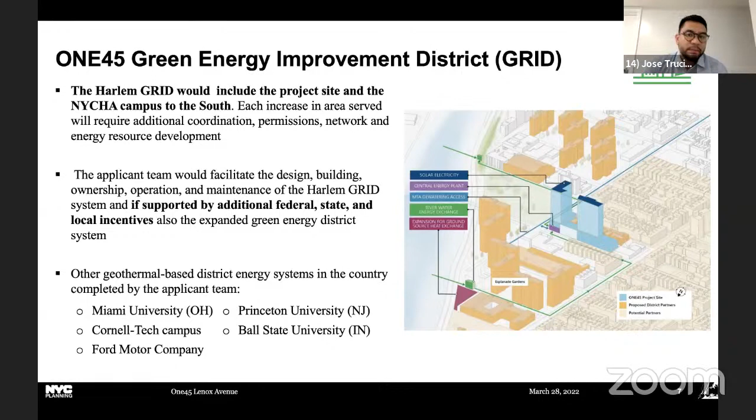The Youth Empowerment Initiative will be open to current residents who live within Community Board 10, between the ages of 17 and 25. It will include a series of workshops, internships, and mentorship components.

The Green Opportunity Workshops will focus on green energy education for local residents and will be sponsored by the New York State Energy Research and Development Authority, which has agreed to grant $5,000 for the administration of this program.

The internship and mentorship program will include up to 20 paid internships that will pay each intern $15 to $20 per hour for a total of 250 hours per calendar year.

Academic credit for the time is still being worked out, and the applicant is working out the kinks of the proposal. Each student will be assigned a work site mentor to foster development of skills and monitor progress with milestone evaluations. Partners include the development team and other associated firms in engineering, construction, green technology, architecture, government relations, legal, and urban planning fields.

This program is fully funded by the developer and is expected to cost approximately $3,000 per student.

On December 3rd, the MTA issued a negative easement determination for the site. While the determination didn't go into detail about the reasoning behind it, the applicant conducted a supplemental feasibility study for the location of an elevator within the new building to provide access to the subway. These feasibility studies focused on topographical and ground-penetrating surveys, identifying substantial complications unique to the site, including proximity to a DOT bridge, water table levels, and structures in the sidewalk that will make creating a vertical transportation system, such as an elevator connecting to the station, very difficult or essentially infeasible.